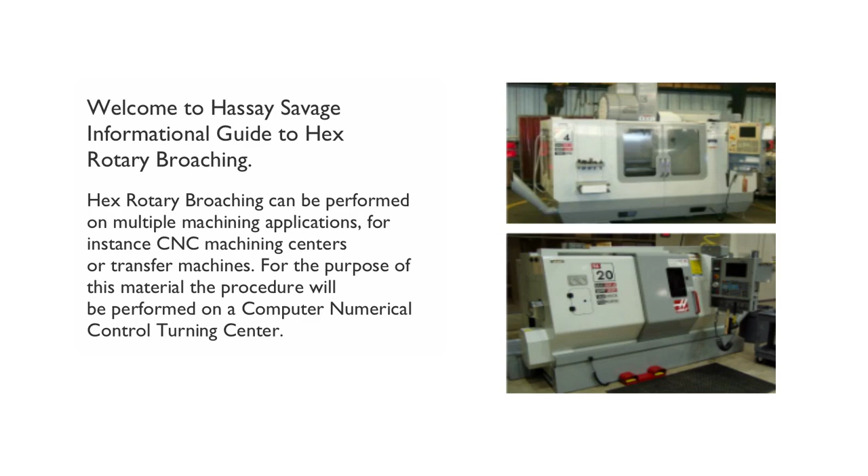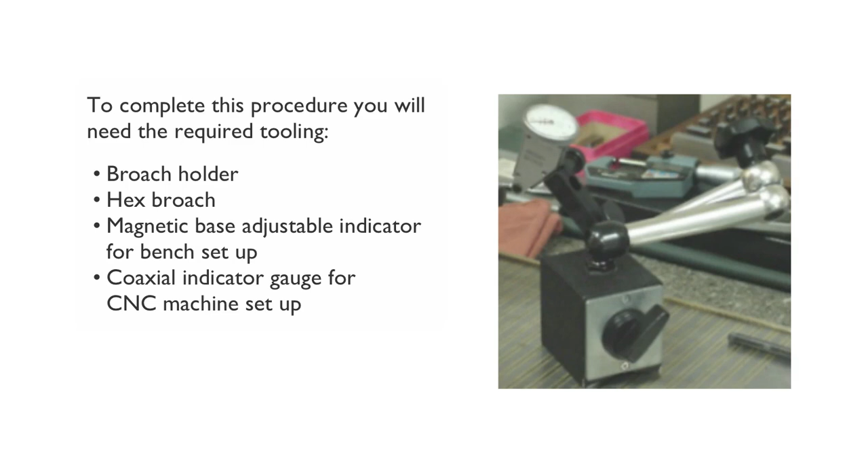Hex rotary broaching can be performed on multiple machining applications, for instance CNC machining centers or transfer machines. For this material, the procedure will be performed on a computer numerical controlled turning center. To complete this procedure, you will need the required tooling: broach holder, hex broach, magnetic base adjustable indicator for bench setup, and coaxial indicator gauge for CNC machine setup.

Before we begin, let's discuss the purpose of the broach holder. The broaching holder serves two functions: one, it holds the broach tool in a free spinning bearing; two, it places the broach tool at a 1-degree angle relative to the center line of the workpiece.

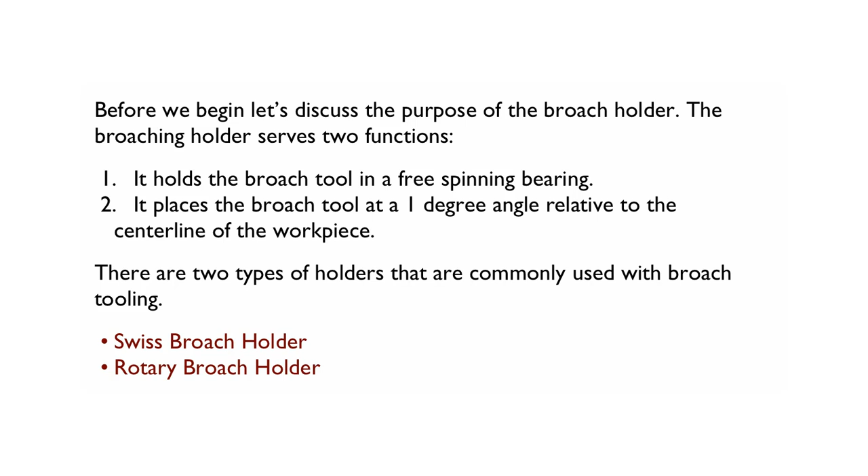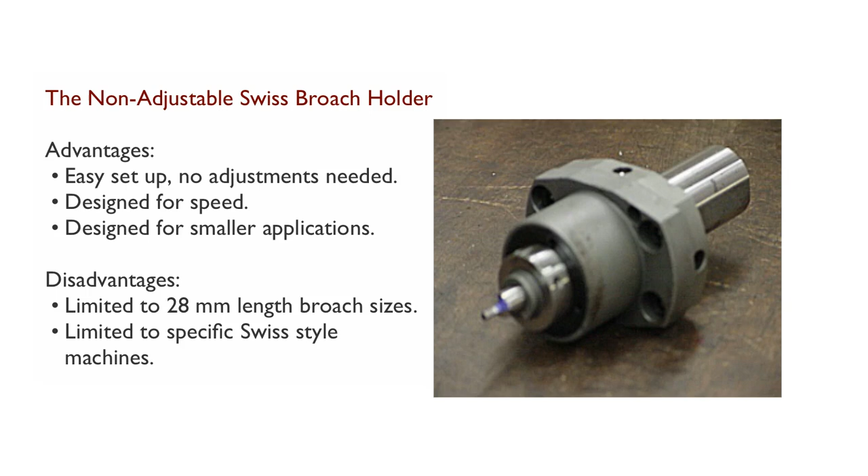There are two types of holders commonly used with broach tooling: the Swiss broach holder and the rotary broach holder. The non-adjustable Swiss broach holder's advantages are easy setup, no adjustments needed, designed for speed, and designed for smaller applications. The disadvantages are it's limited to 28mm length broach sizes and limited to specific Swiss-style machines.

The adjustable rotary broach holder's advantages: allows for vast broaching capabilities, designed for speed, and designed for larger machines. The disadvantages: somewhat difficult to set up, requires adjustments, and limited to vertical and horizontal machining centers.

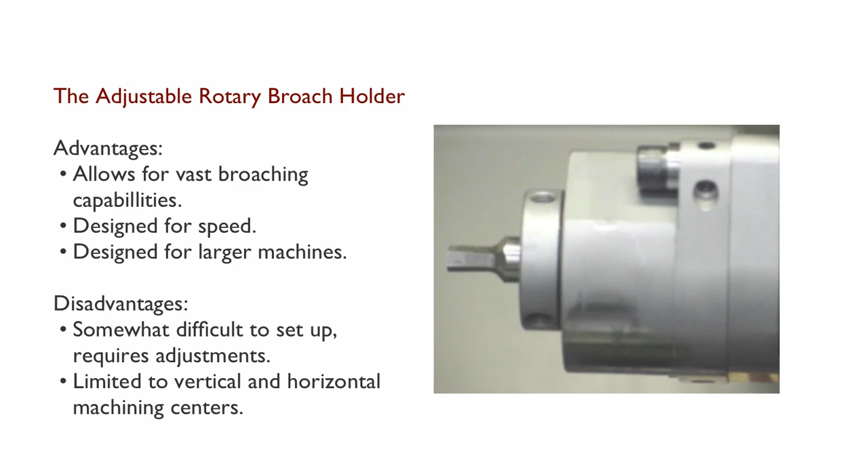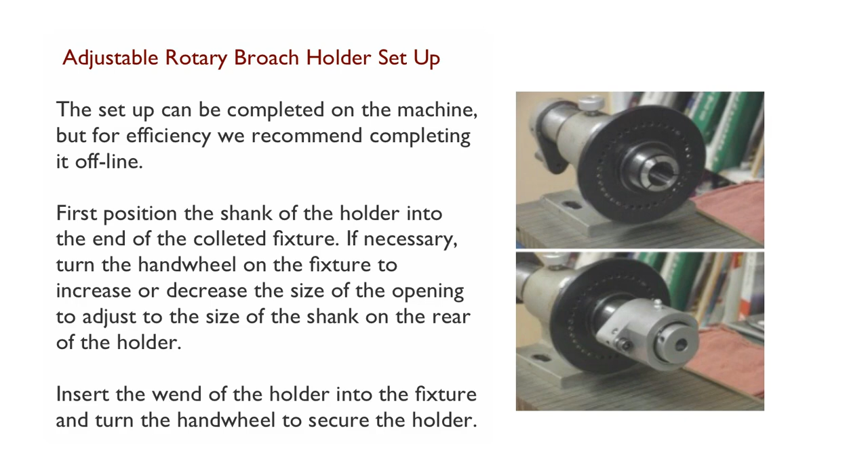This setup can be completed on the machine, but for efficiency we recommend completing it offline. First, position the shank of the holder into the end of the colleted fixture. If necessary, turn the fixture to increase or decrease the size of the opening to adjust to the size of the shank on the rear of the holder, insert it into the fixture, and turn the hand wheel to secure the holder.

Loosen the two set screws on the front of the holder. Insert the hex broach into the front of the holder backwards, with the circular end facing out for ease of indicating. Tighten the two screws to secure the hex broach in place.

Retrieve the indicator gauge and position the tip of the gauge on the end of the broach. Zero the indicator before gauging the setup. Turn the hand wheel on the fixture while watching the indicator to determine if the broach is aligned on center with the shank of the holder. Readings between .001 and .002 are acceptable limits.

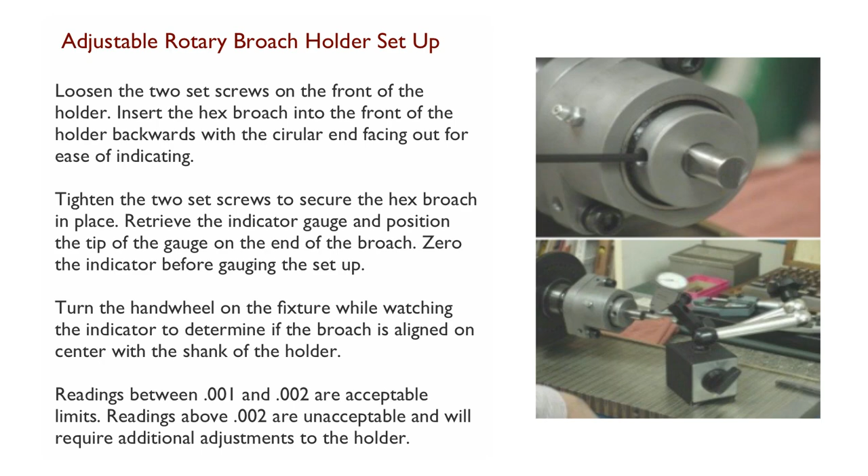Readings above .002 are unacceptable and will require additional adjustments to the holder. There are several adjustment screws on the holder that may need to be adjusted to set the center line. There are two large Allen screws that secure the face of the holder together.

Using an Allen wrench, loosen each of these. Next to each of these large Allen screws are 3 set screws. Each one of these set screws acts as a pivot point for the face of the holder. Using the Allen wrench, loosen or tighten each one accordingly.

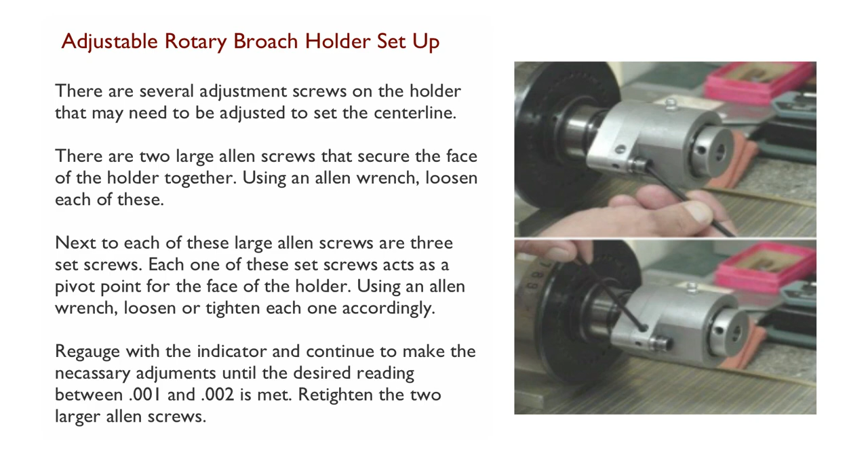Re-gauge with the indicator and continue making the necessary adjustments until the desired reading between .001 and .002 is met. Retighten the two larger Allen screws.

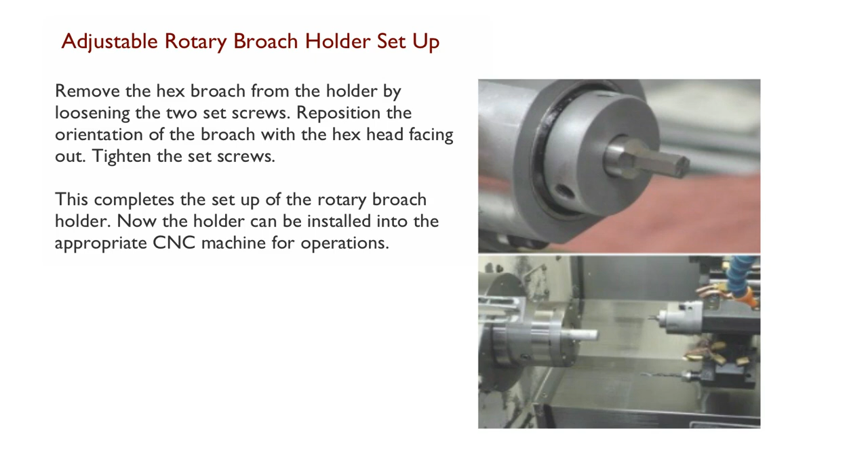Remove the hex broach from the holder by loosening the 2 set screws. Reposition the orientation of the broach with the hex head facing out. Tighten the set screws. This completes the setup of the rotary broach holder. Now the holder can be installed into the appropriate CNC machine for operations.

Basic principles of the procedure: the CNC turning machine performs each of these operations on the workpiece before the hex broach makes contact with it. Face off the workpiece. Next, spot drill a 90-degree chamfer to a diameter slightly larger than the maximum diameter of the broach form.

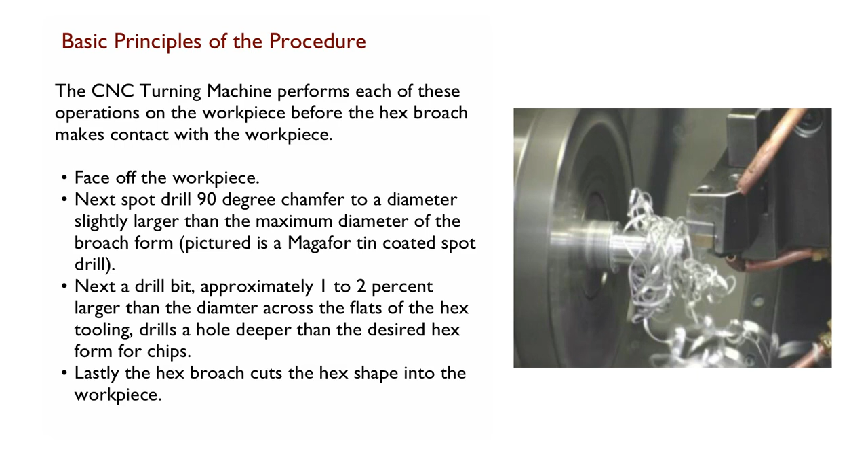Pictured is a Magafor tin-coated spot drill. Next, a drill bit approximately 1 to 2% larger than the diameter across the flats of the hex tooling drills a hole deeper than the desired hex form, for chips. Lastly, the hex broach cuts the hex shape into the workpiece.

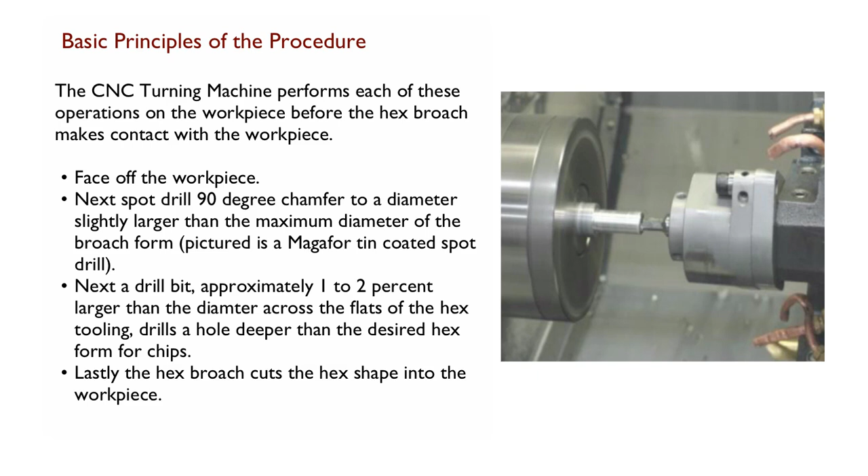How does the hex-shaped broach tool cut the workpiece? First, the holder positions the tool at a 1-degree angle relative to the part center line. When the tool contacts the part, friction drives the broach to rotate synchronously. The cutting edge of the tool is kept on center and the rest of the tool oscillates around the part center line with a wobble effect.

The 1-degree offset only allows the leading point of the tool to cut into the workpiece. While rotating and generating the entire profile, the wobble effect of the tool simulates a cam-style cutting motion while shearing the shape into the part as it advances forward.

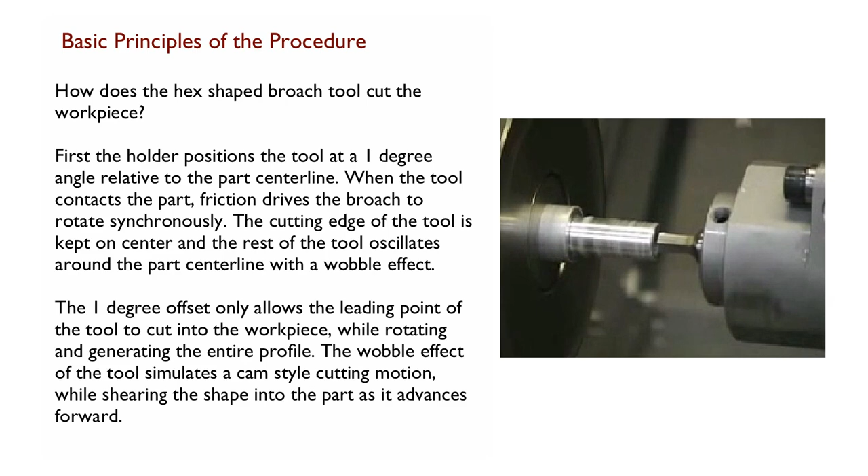Adjustable rotary broaching FAQs. What are the differences between rotary, wobble, punch, and index? Rotary and wobble: the tool shape is cut into the customer's part with spindle turning when using a rotary holder system.

Punch: the shape is cut with a spindle locked in a stationary position, and a broach is then punched into the customer's part. Index: a broaching process that involves a stationary spindle and a partial form of the shape to be generated. Once hole preparation is completed, the tool form is generated on a Swiss-type machine by making imprints of the tool to the proper depth, while the part is indexed properly to create the full form desired.

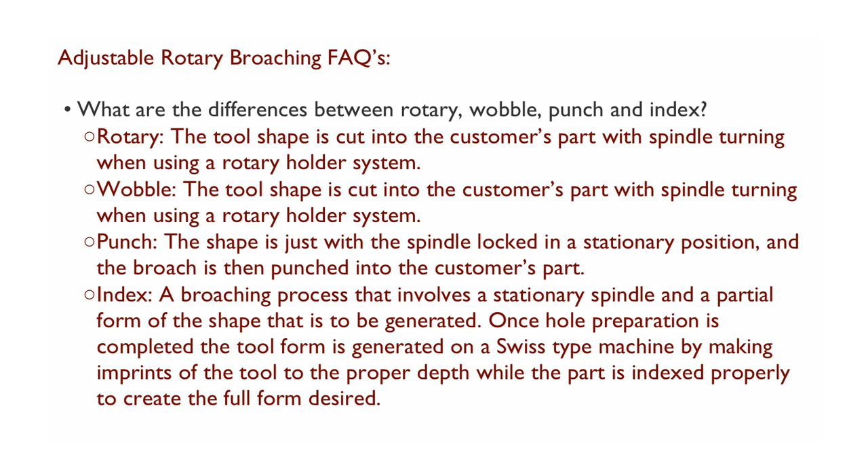In order to use a rotary punch broach, what else is needed? How do I determine which holder will work for my machine application? Can I use a collet system with a rotary broach? Can I use a collet system with a punch broach? What type of coolant can be used?